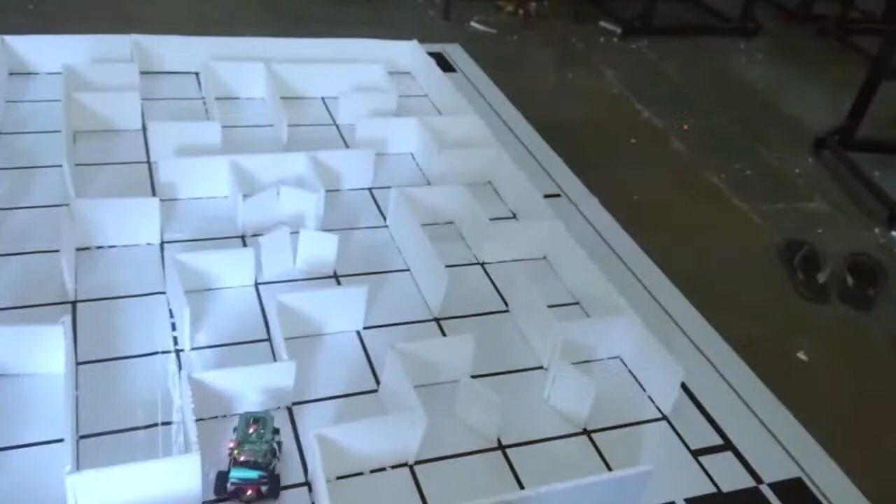Before eYantra, what I used to do apart from studies was totally unorganized. But when I participated in eYantra, they gave me a structured way of learning. From now onwards, if I get a new problem, my approach won't be a hit and trial way. It will be more systematic.

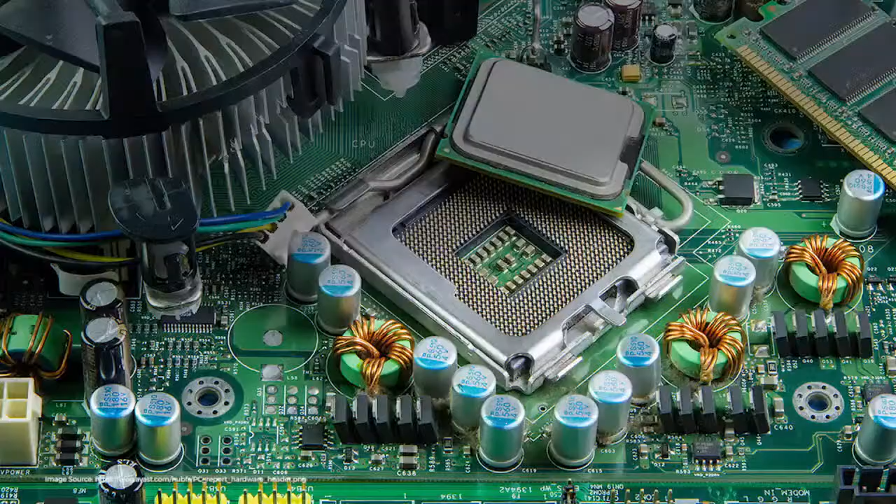We actually got to integrate something mechanical, hardware, with software. Usually most of our projects were either just hardware or just software, so we thought building those parallelly and in the end getting it together would just make the thing work. But actually we learned that we have to do everything step by step. Even if it's software and hardware, they're not totally independent. Everything needs to be done step by step, test if it's working, and then keep going forward.

In mechanical aspects, we tried to design the bot at first and we failed badly. Somehow interdisciplinary subjects were being taught to our brain, fed indirectly, and we were practicing them. So that failure actually helped us to do stuff very good.

We learned how to start from scratch, building things up and how they are working at the back end. That's the main plus point we get here. And this also gets us the interest - rather than just theory, we have the practical stuff going on.

For electronics, PID is taught theoretically in control systems. But when you actually implement it in eYRC, you actually see what you were learning theoretically in the classroom.

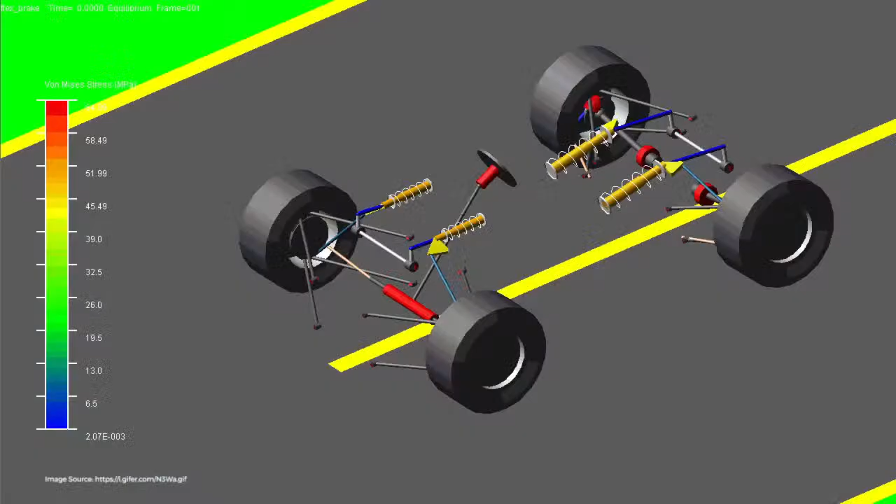Many people have a fear of doing an actual physical robot, the hardware, because in simulation everything works. But when you are implementing something in hardware, there are very big challenges that you face that you cannot predict. So after this entire eYantra competition, I feel that I am very much confident in taking on any hardware projects head on.

When you attend daily lectures in college, you'll be seeing a theoretical explanation of the topics. But when it comes to eYantra, it's a top-down methodology where you will learn things and be implementing them right away to check if it works or not.

And that's how it also stands up against other robotic competitions, where there will be only one thing - you'll go with your implementation and participate. But eYantra is like, it helps you learn. It teaches you first and then checks which was a better implementation. So for me, I think eYantra is a great way, a better way of learning.

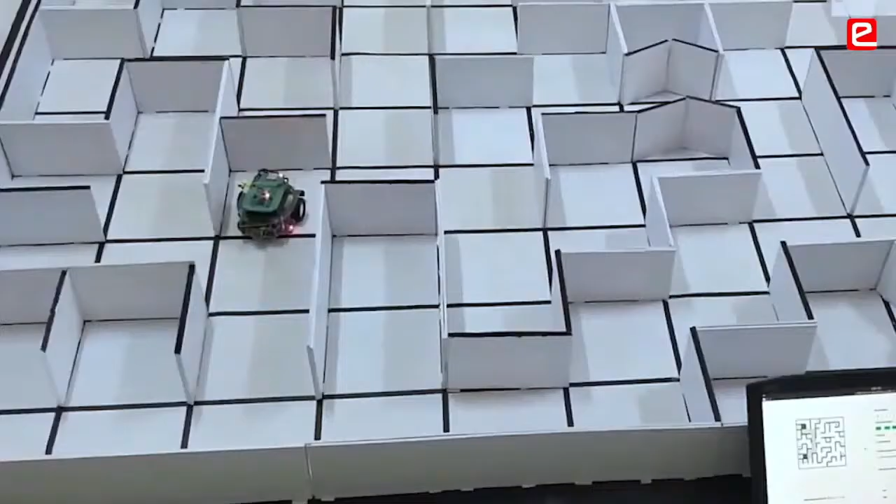Till now, whatever competitions or hackathons we have attended, we have not really found that sort of experience where you're also learning in the process. You're just usually applying whatever you know, and it's more of a test of how much you knew before. Here it's more about how you can come up with creativity and all that. Also the hardware platform was completely unified across all teams.

You don't have time, you make time. Once you are inside eYantra, it's just gonna compensate for the free time - you're gonna have more fun than you had in free time. Working with the new stuff that you get, the kit that they give, and solving these challenges have been more enjoyable and fun to work with.

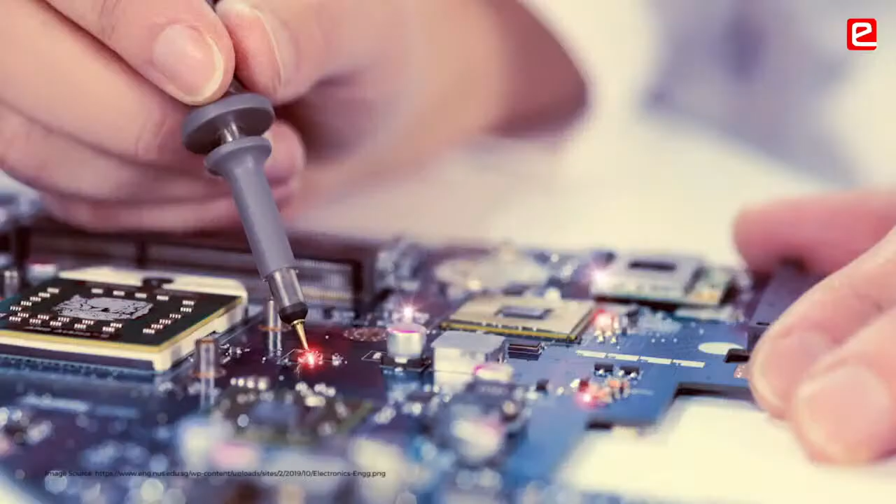eYantra Robotics Competition broadens you, helps you look at various disciplines and integrate them together. Before eYantra we were very limited to CS and were not seeing outside our own branch. We used to think electronics isn't something we should be interested in. But robotics has a huge, broad area of working, so we have to know how to integrate these smaller things and learn a lot of skills not particularly in our branch. I feel a lot of engineers must know this if they want to be particularly good at their applied field.

eYantra is life-changing for me. We saw that even the minutest thing we did in the first task, which we thought would never matter, really came back to bite us towards the end. This has fundamentally changed the way I code and solve problems, and I can confidently say I am a better problem solver right now.

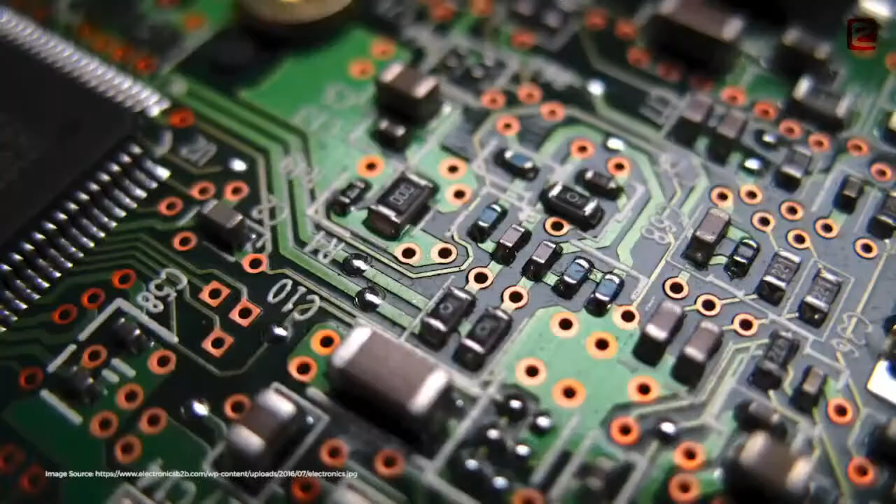I've never done anything like this before. I was only aware of designing stuff, but PCB designing, PCB manufacturing, as well as the electronics part is very much new to me.

For me, it is more than just a competition. It's a place where you can learn new things. Sometimes even people who have interest in electronics can't afford this stuff, so they pass it on. If you take part in eYantra, they provide a lot of things and the guidance is also very great, sir. We had regular discussions on Piazza and all that stuff.

My thinking has changed. A year ago, if someone had said you have to make a fish or a robot that can move underwater, I would have said no, that's not possible for me. I was a leader, and some of my leadership qualities also improved. Other than that, technically it was a blast.

We had to learn a lot of new things and apply them in a creative and innovative manner. eYantra themes are designed so that we have to think outside the box and be creative to get a good solution to the problem they've posed.

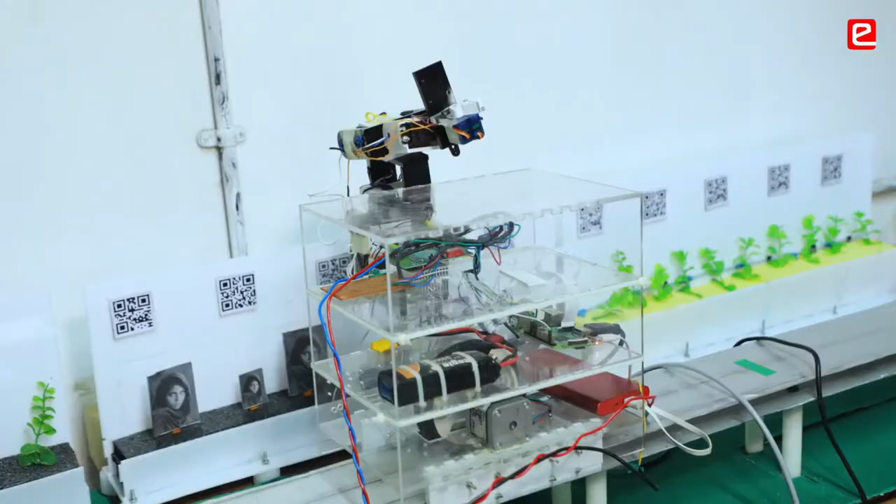Another soft skill it taught me is presentation, how to present things beautifully. Actually, I am from the hardware side, I have worked with hardware, so in that hardware there are many wires and all, and how to present them, mainly that we learned from eYRC.

My confidence was very low. I was not that much confident while speaking in front of the camera or in front of people, but from this competition, I learned all those things.

I also learned many qualities like leadership actually. I was the leader of the team. Before this, I had not been a leader, or I didn't have confidence to lead a team. But here I learned how to coordinate my team and how to get work from them.

At first I had zero level confidence. By entering this eYantra competition, I gained a lot of confidence. It helped me build communication skills and present myself in a better way.

Taking part in the eYantra's idea competition has made me really disciplined. The weekly schedule for the coursework plus the deadlines for round 1 and round 2 submissions really made me disciplined about how and when I should be finishing my work. It helped me finish my final year project earlier and even made it better than before.

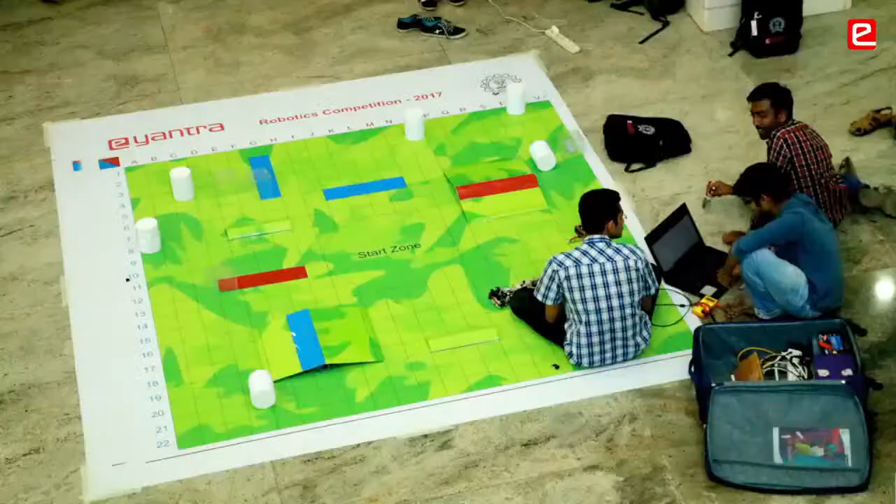Such competitions will not only boost your confidence, but will also give you exposure to a unique type of learning which is lacking in India, that is experiential learning. So I would encourage anyone to join eYantra's ideas competition for the next cohort.

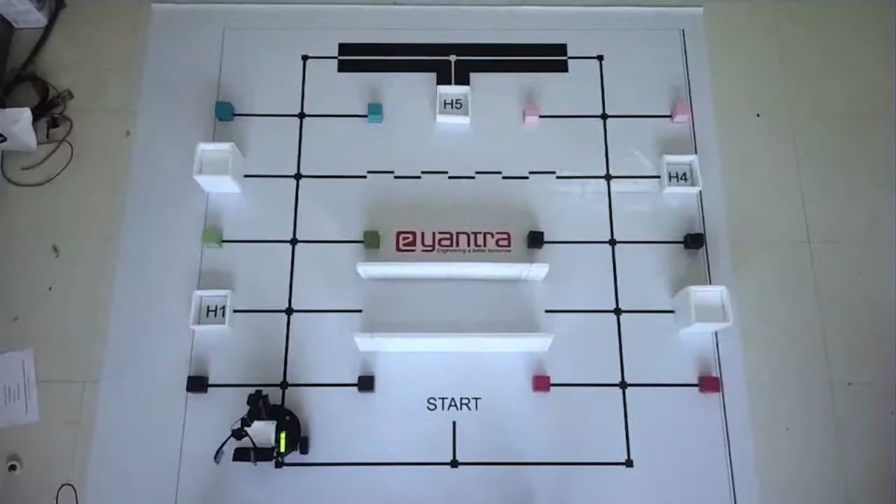It created an impact on me, because all the things carried out through this competition as well as the internship have affected my life a lot. My focus shifted from the comfort zone towards a zone where I can explore more things.

In my life, the change I feel is the confidence I'm getting from eYantra to stand before and speak in a technical language with people or with someone talking to me in that field. I've improved myself in coding with the help of eYantra only. I've started focusing and getting more and more interested in it as I am exploring it.

I was having a problem with peer pressure. I was not able to give a speech or a video to anyone in public, so I was having that peer pressure. Before, I was not talking publicly to anyone, like not having a stage daring. I couldn't even speak a word, I would just leave the stage, and that was the issue.

In some tasks we need to make introduction videos. In those videos, it was like we took hundreds of takes to make a successful one-take video. So due to this I'm now confident to speak among people.

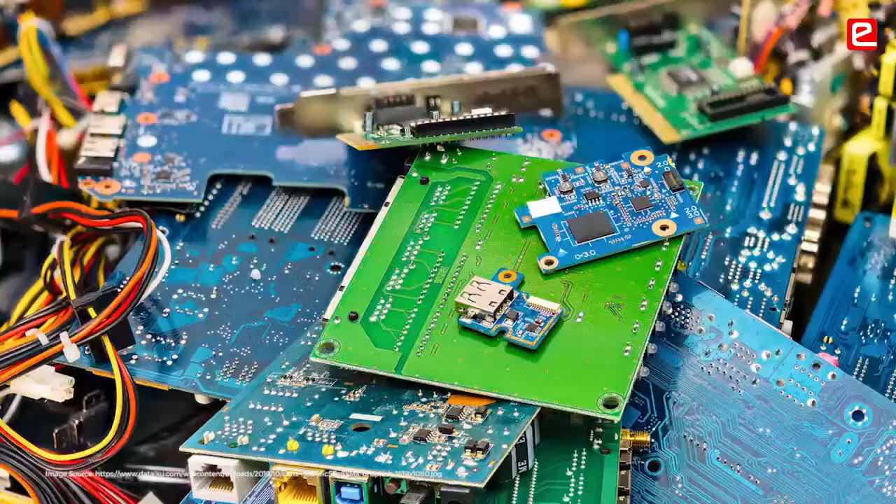I'm in electronics engineering and I was confused whether to go with computer applications like coding, or go in the electronics section like hardware and power supply. So in eYantra I got the idea that I can go with both of them.

It is like a culture for me. Why am I saying culture? Because I want to place one quote: when experts are being built, they are first beginners. And as we are beginners, we are in perfect hands, we think, with eYRC.

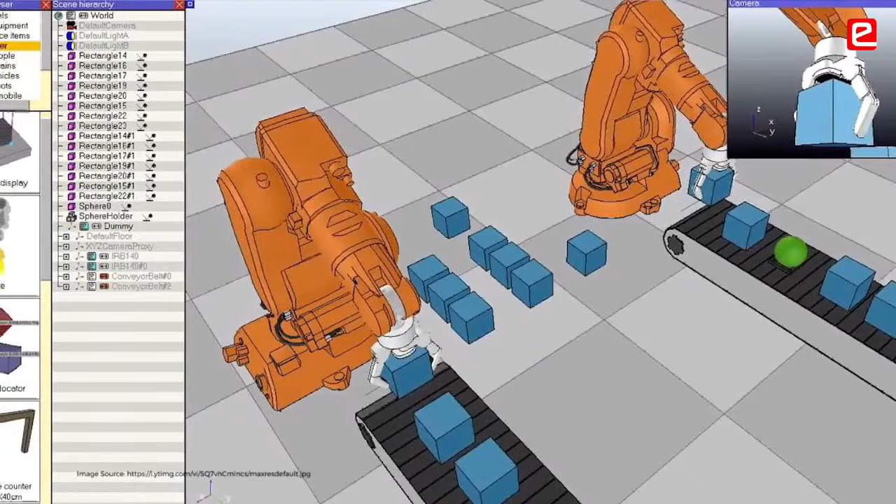Because for getting introduced to all these things, no other platform will teach us starting with the basics, or ask us to first complete basic levels before coming to them. They'll give directly one problem statement, but that was not with eYRC. They started with V-REP simulation, then actually came to hardware testing, and then gave us the platform to start working with the real bot.

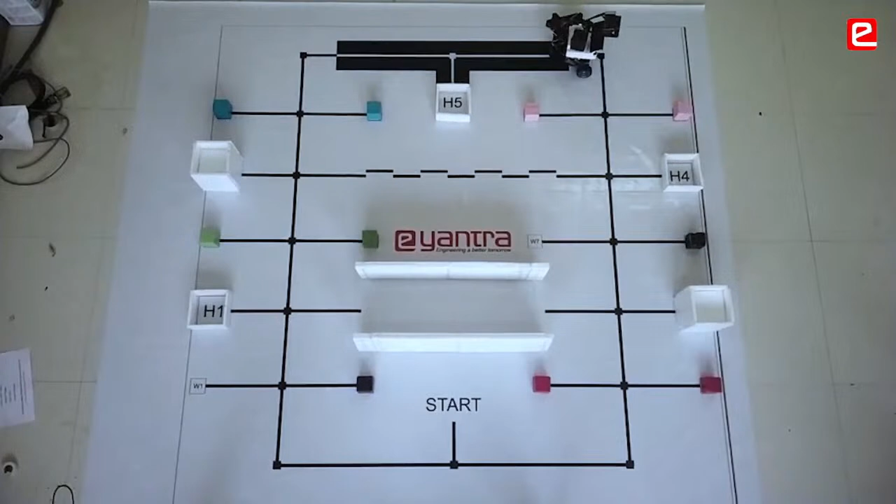They are building us like a family. What our family members do for us, they always think how we can go forward and do things, how this, our children, can get benefit. The same thing eYRC also does.

I will say that no other company will give this chance to us to get such sessions carried out in the internship. They will just provide us the statements and all the problem work we have to do for them, and they will say start with your job. But that was not with eYRC. Definitely, they have boosted us a lot.

The first year I actually missed eYantra, it was because of time constraints, because we couldn't complete the project in time. So it actually taught me how to manage my time.

The second year, I just took some of my friends in the team who I thought would be a great fit, and it would be a lot of fun working on the project. But I didn't actually know how to build or manage a team. So that's the second thing I analyzed on why we failed. I didn't have the team building quality.

So in the second year, I learned team building qualities from eYantra. And this year, I had the perfect team. We managed the time well, and that's why I believe we reached the finals. But this year also taught me a lot of things: to expect the unexpected and always have a backup, in case things go wrong, in case your bot breaks.

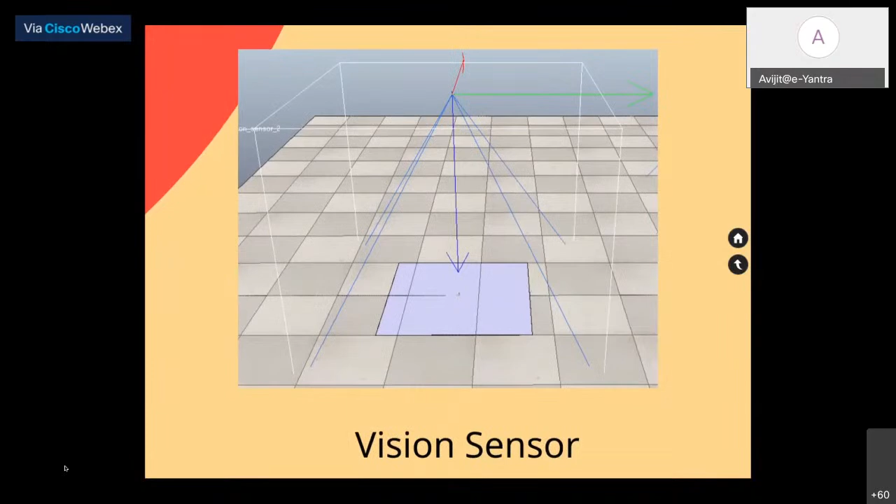Each platform has a vision sensor on top of it, used to determine the location of the ball. This is an example of a 2DOF ball balancing platform that was assembled by the participants. The ball dispenser is used to release the balls at an interval of 80 simulation seconds. The conveyor belt and the downpipe are used to transfer the ball from the center table to the adjacent tables. This is the collection box in which the balls were deposited from the corner tables.

Now let us talk about the AutoGrader application, a cross-platform app that helped in auto-evaluating the task at the participant's end. On the first page, teams had to enter their team ID and the path of the workspace where their codes were present. On the next page, a randomized sequence of the balls was generated. This sequence, when transferred to the simulator CoppeliaSim, reordered the position of the balls in the ball dispenser. At the end of the theme run, the value of various parameters were listed for the teams, and an encoded text file, gibberish to the participants, was generated and submitted on the portal.

Here is our theme film.

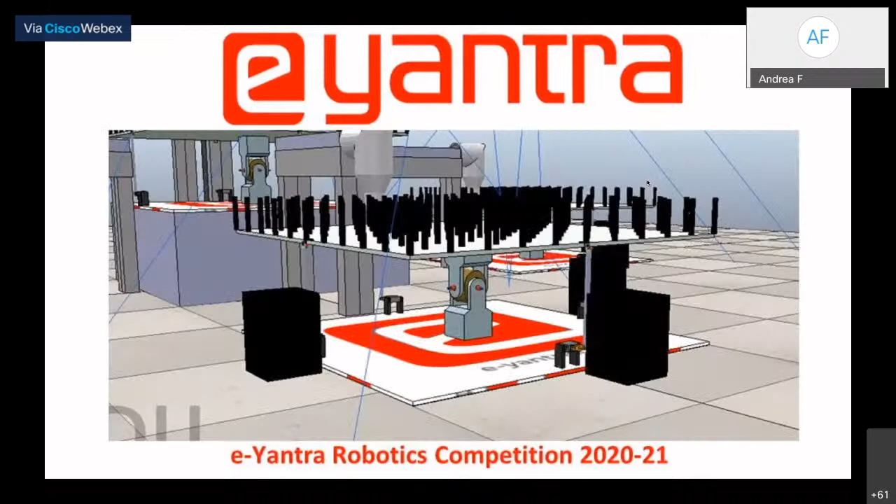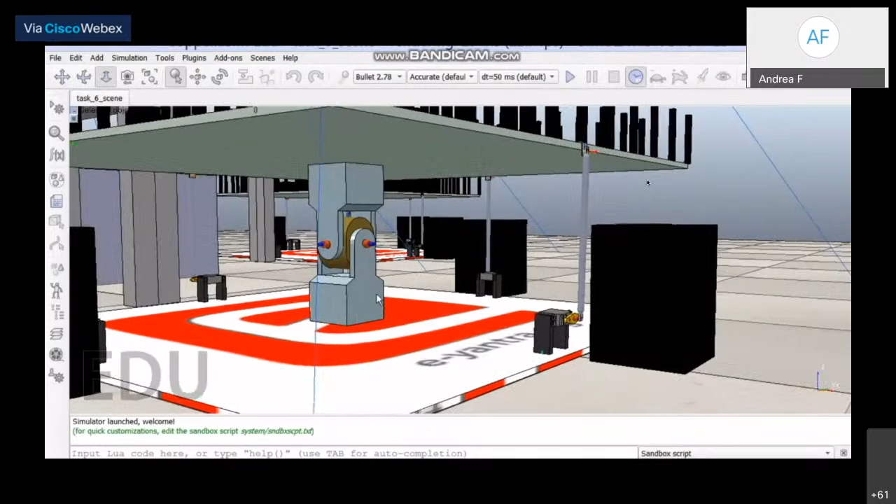The unique feature of our ball balancing design is that we use one servo on each side of the plate, with the L connector connected at the center of each edge. This gives us no vibration, and we were able to balance the ball at any part of the table. Initially, we designed the ball balancing platform using 2 servos, but we weren't able to control the ball at extreme locations on the top plate. Therefore, we used 4 servos and achieved better stability.

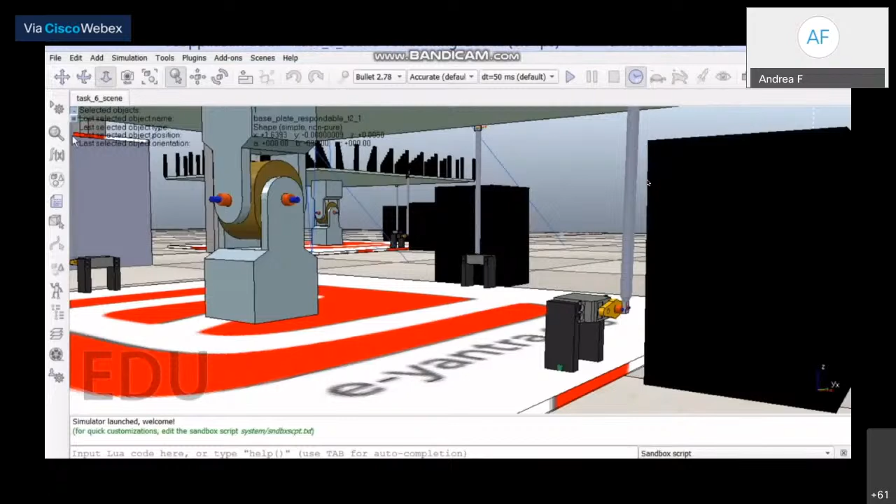We have used revolute joints at places where we need one degree of freedom, that is at the yokes, and force sensors at places where we need rigid links. The ball balancing platform is controlled with the help of revolute joints attached to the servo fin. The handles of the revolute joint are initialized in the task 3 init setup function, and then with the help of PID control, the revolute joint angles are changed in the control logic function, thereby controlling the maze.

This is the grader application. We first enter our team ID followed by the directory of the Python files. Next, we click on the start button on the GUI app.

We have designed our ball balancing platform using 4 servos, one on each side. Using 4 servos provides an additional advantage to control the ball at any point on the table. The L connector is connected at the center of each edge, thus providing stability and avoiding vibrations.

To maintain a real-time factor of 1, we inverted the model properties of the inactive maze tables so that only the maze table in which the ball is traversing is dynamic in nature. We have called the control logic which controls the servo movements of the table every 100 milliseconds. The ball balancing platform is controlled with the help of revolute joints attached to the servo fin. The handles of the revolute joint are initialized in the task 3 init setup Python file, and then with the help of PID control, the revolute joint angles are changed in the Python control logic function, thereby controlling the top plate.

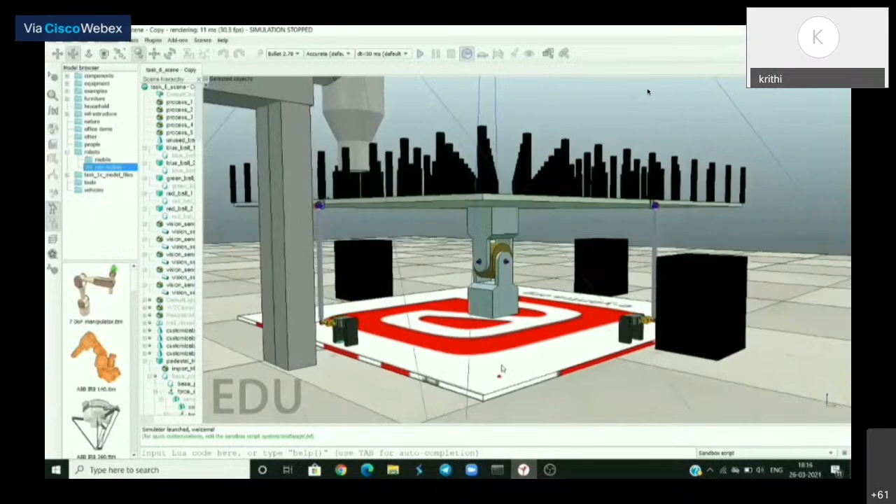Our team was assigned the task of designing a 2DOF ball balancing platform as part of the theme. The unique feature of our ball balancing platform is that we aimed at achieving the best performance using the minimum number of resources or equipment. So we have achieved 2 degrees of motion by using 2 servos. We have used a universal joint at the center of the model which supports 2 DOF motion.

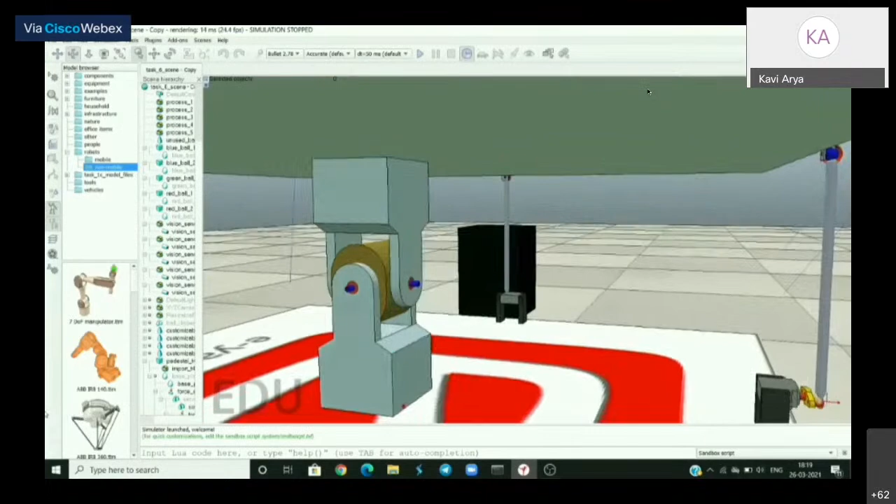Initially we considered the use of 2 as well as 4 servos, but in our simulation we found that the universal joint was capable of holding the weight of the top plate. Also, in the case of 4 servos, the 2 servos which would act on opposite sides would perform the same job, also increasing processing. Thus, we have finalized our design by using 2 servos.

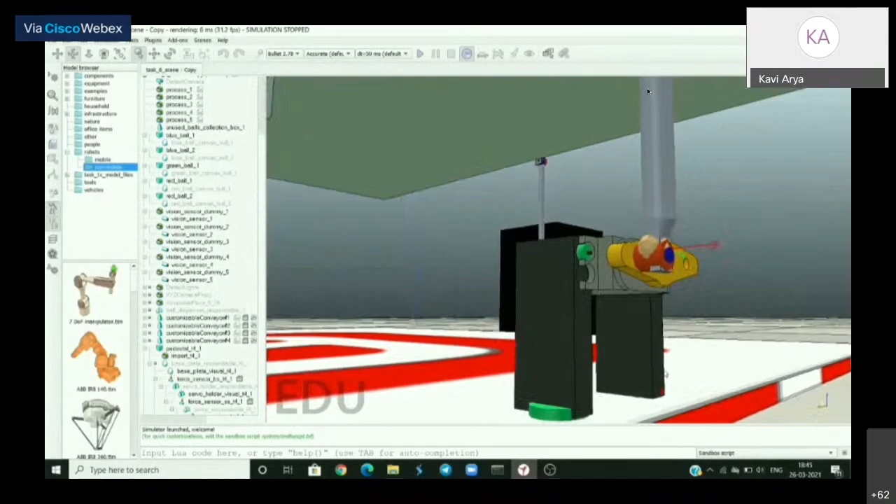The servo fin is connected to the servo by using a revolute joint which is motor enabled. The servo fin is made to rotate in the range of -90 to +90 degrees. This rotation of the servo fin causes the up and down motion of the connecting rod, which is connected to the servo fin by using a revolute joint.

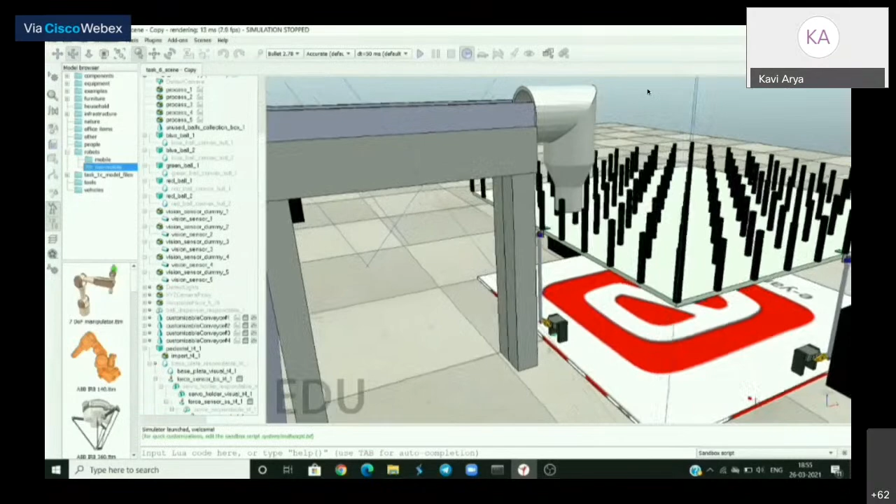This up and down motion of the connecting rod causes tilting of the top plate, which is connected to the connecting rod via an L connector and a spherical joint. The spherical joint, being a 3DOF joint, assures smooth movement. The platform is controlled by using a PID controller which computes the error in ball position. This error is used to adjust the angle of the servo fin accordingly.

Simulation starts with the generation of mazes on top of the tables. The provided maze images are processed to form encoded maze arrays which are used to generate walls on the tables.

The first ball is dispensed from the ball dispenser and is transferred to the first table T4 through the conveyor belt B4. From the conveyor belt, the vision sensor detects the ball and the color of the ball is detected. Here it is red.

The collection box is determined by reading the ball details JSON file provided to us. Here the collection box is found to be CB3 on table 1.

The path drawn on top of maze is found using A-star algorithm. We used A-star as it gives the optimal solution by using heuristic function in a shorter time.

The second ball has dispensed from the ball dispenser. By this time, the first ball has completed its traversal.

The second ball is a blue ball and its collection box is determined as CB1 on table 2. It is transferred to the table T4 for traversal.

The ball motion is controlled by the PID controller. From each table, the corresponding vision sensor image is processed using image processing to find the ball coordinates. The error function used by PID is responsible for the movement of the ball.

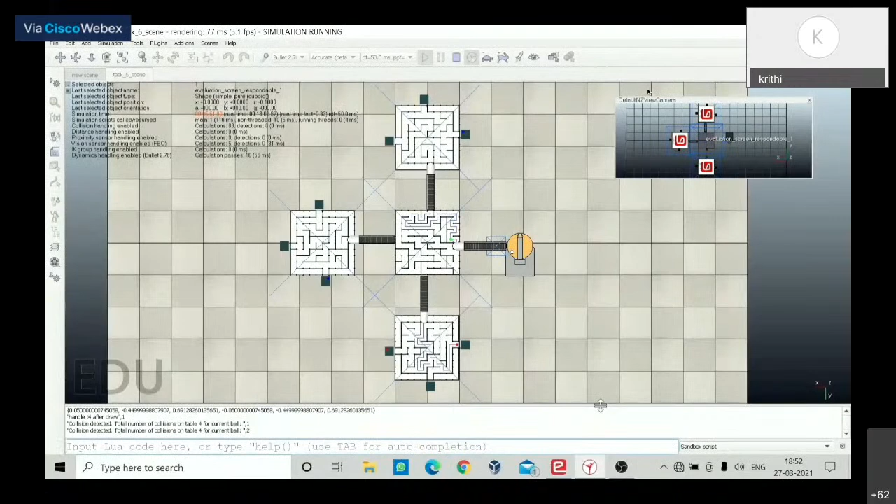Now we can see the parallel processing. Both the fifth and fourth balls are traversing at the same time on different tables. The last ball is a green ball and its collection box is determined as CB2 on table 3.

Another challenge was finding the ball coordinates when the ball passes through the end cells, as seen now. The height of the walls was making it difficult. We used Hough circle to estimate the circle and to find the centroid in this case,

and minimum enclosing circle when Hough circle was not giving the proper results.

Tuning the PID was the most difficult part for us. We found that the ball underwent collisions on traversing long paths. To solve this, we considered intermediate set points when the difference between two set points is large.

With all this, we could come up with an algorithm that gave us good results. Thank you.

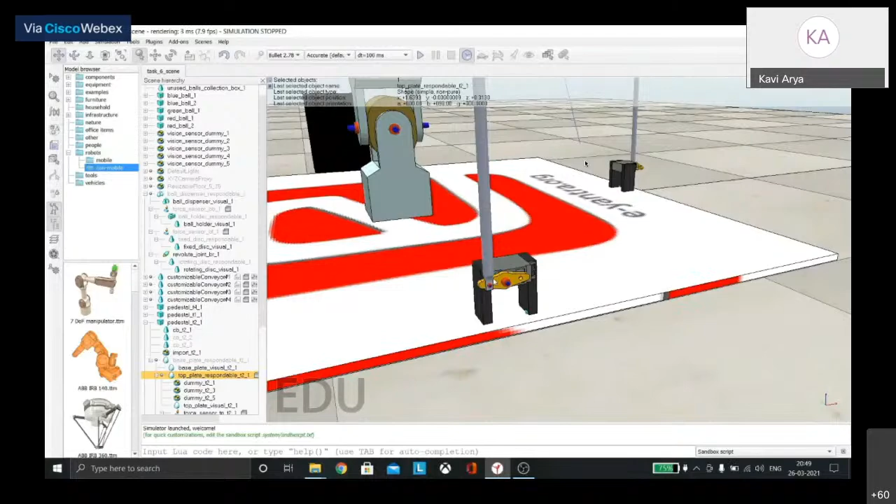The algorithm sends signals to each fin that tell them to rotate in a certain way. The connections from each fin all the way up to the top plate ensures that the platform inclines in the way it's intended to. The servo fins have opposite orientations to each other. This was done to make the code structure more aesthetically pleasing.

Our code is generic enough to support each and every table, the only changes being the table serial numbers like T1 and T2.

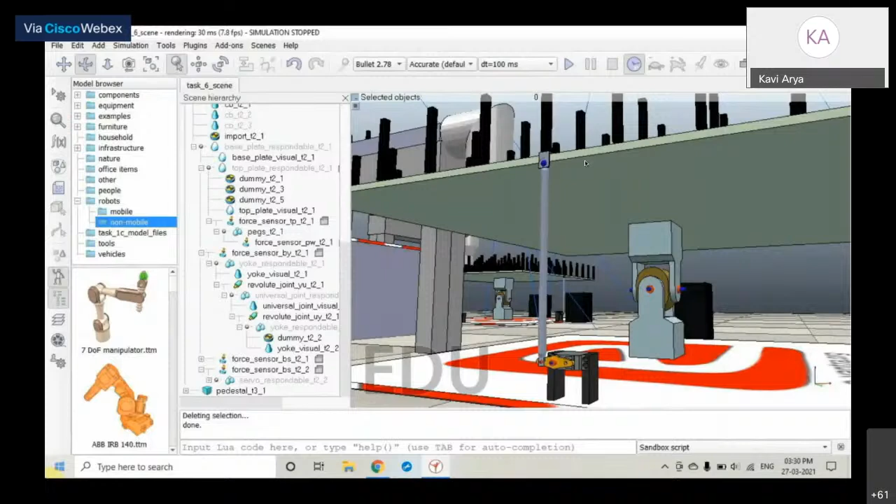In order to make the support at the center, we use two yokes along with a universal joint, that were connected by using two revolute joints. We have two servo motors, so it requires four servo holders to hold the servo, and each two servo holders for each motor. The shaft of the servo motor is connected with the servo fin.

The servo fin is then attached with the connecting rod. The other end of the connecting rod is connected with the L connector. The L connector and the connecting rod are joined by a spherical joint, and the joint between the servo motor and the servo fin, and the connecting rod and the servo fin, is revolute. So a similar connection is made to the other servo also.

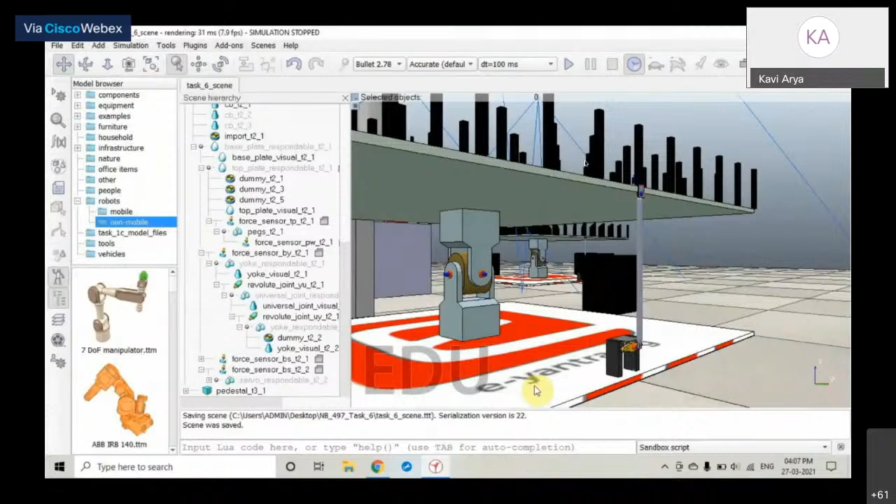So thus we completed our ball balancing platform. In total we have used two servo motors, four servo holders, two connecting rods, two servo fins, two L connectors, a base plate, a top plate, two yokes, and a universal joint.

So we are about to start our evaluation for the final team run. Now the grader application takes control over the simulation. We can see that all the mazes have been successfully decoded and generated. Now as the simulation has started, we have the blue ball arriving first.

Now the first ball has been transferred to table 2, where it will be navigated to collection box 1. We use the A* algorithm for path planning, which uses heuristics to find the shortest path, which also takes care of the direction. Now we can see the second blue ball is about to arrive at table 4.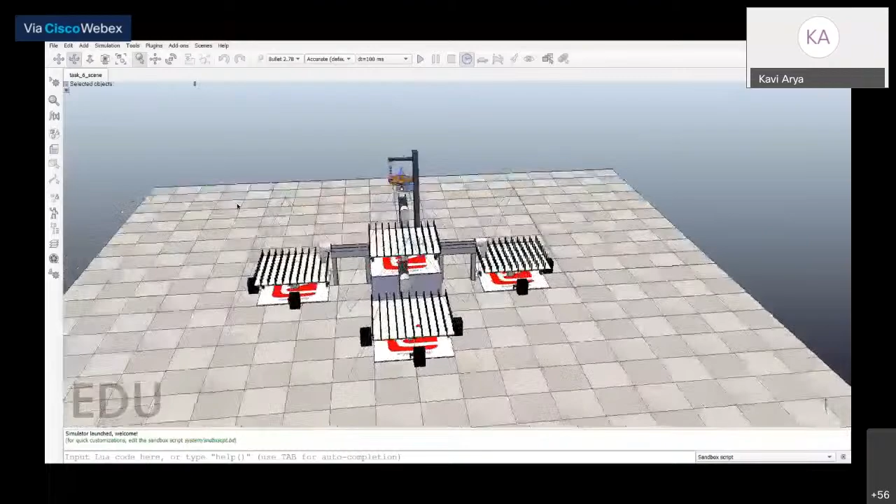While designing the ball balancing platform, our main objective was to design a simple, no-vibration, stable model. We were very conscious about designing a model using fewer components but with good stability.

Two yokes connected using a universal joint have been placed in the center to support the top plate during its movement. Four servo motors have been used for the perfect continuous tilts of the plate with respect to the ball traversal, and opposite pairs of servo motors work synchronously in exactly opposite directions.

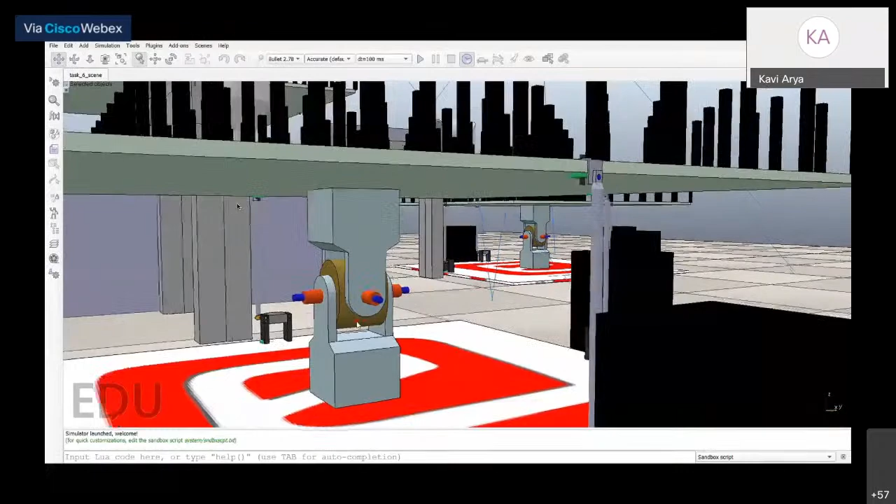The servo fin is positioned parallel to the top plate for easy calculation of the output angle. Since it is a 2 DOF platform, each pair of servo motors controls one direction. The servo angle is obtained for each axis separately using PID, and it is given to each servo motor in the same magnitude but opposite direction.

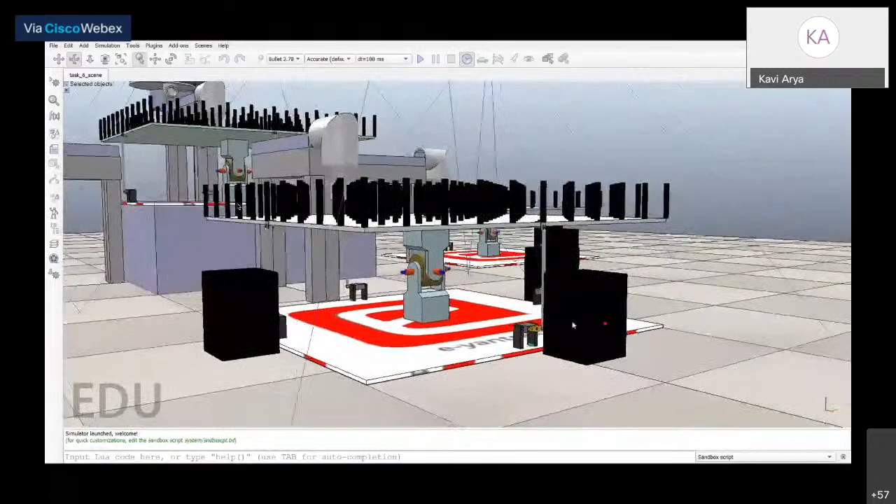One special feature of our design is that we have used 4 servo motors rather than 2. This contributed majorly towards stability, especially during the continuous tilts of the plate when the ball is traversing. Using 4 servos, the table cooperated very well with the code.

The ball is passed onto the conveyor belt by the ball dispenser. We have used a hold and release mechanism to prevent the initial collisions and deviations of the ball.

We have made the ball traverse faster by applying a threshold instead of making the ball traverse to the exact set point. We make the ball shift to the next set point as soon as it is within a particular distance nearer to the set point.

When the ball gets deviated from its path or when it is not found by the vision sensor, after a few seconds the shaking function is called. Through this, the table shakes slightly and the ball gets back to its position, and then the backup function is called. The ball finds its path from its current position to the actual endpoint and traverses through the path.

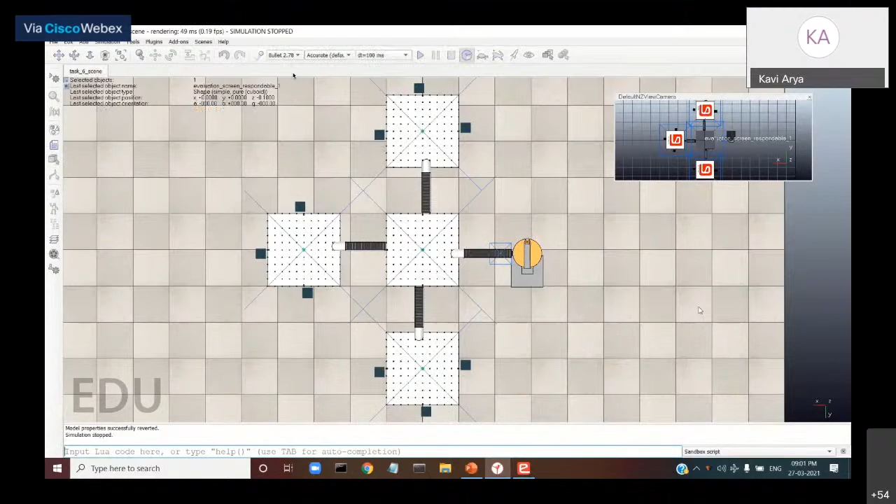So that was team ID 2487.

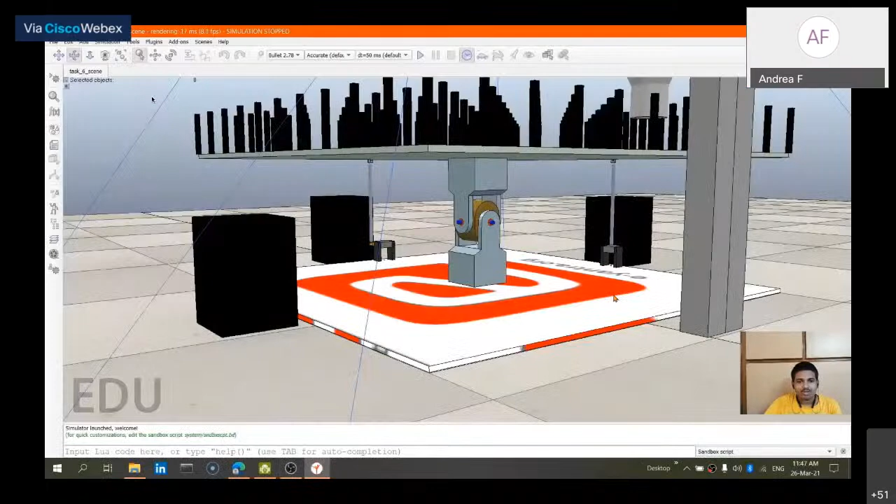Coming to the ball balancing platform design, this is a ball balancing platform which we have used for the whole theme run. Here we can see that the top plate is connected to the servos with the help of L connectors and connecting rods, which will help in the movement of the top plate with respect to the movement of the ball. We can see that a universal joint is given as a support to the top plate, so that if the ball weight is increased, it will not collapse.

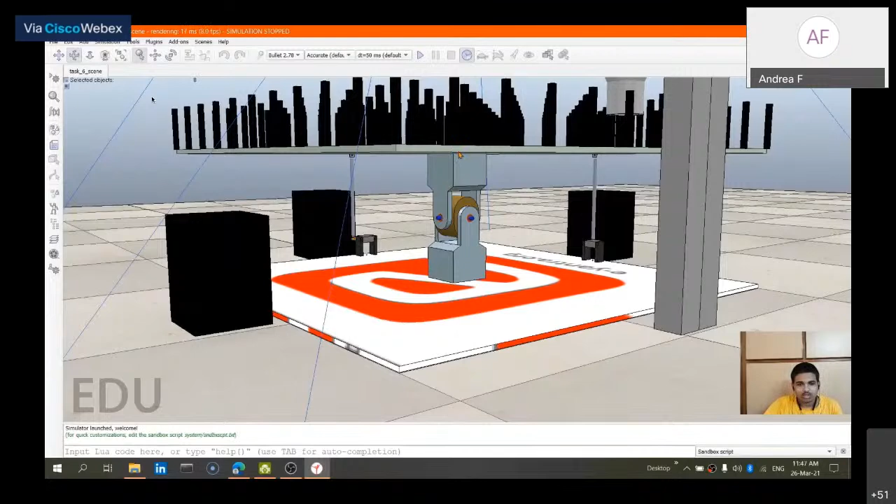Coming to how we have designed the ball balancing platform, we learned about each and every part given in the eYantra portal and where we should use it in the design, from the internet. For example, we learned about the yoke and how to use it in the ball balancing platform, so that we came to know we should use it to get a two-dimensional movement for the platform. Similarly, for every part we learned what is the use of that part. Finally, we merged all the learnings and came up with this design.

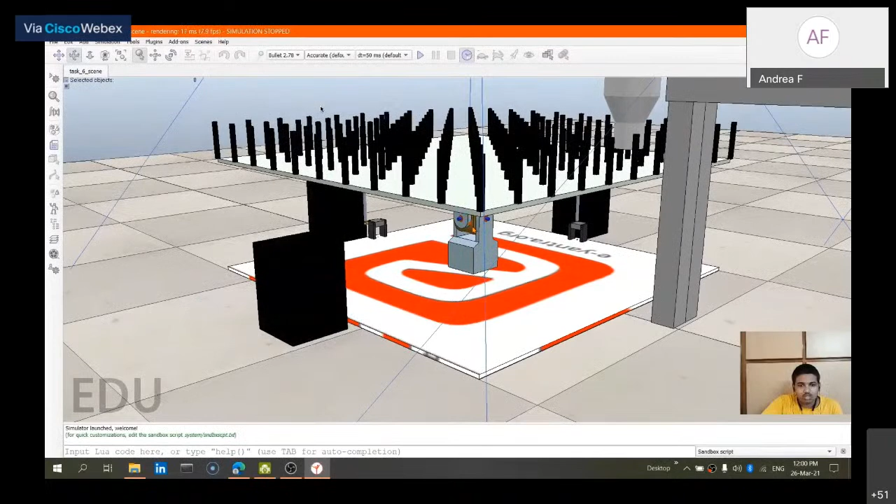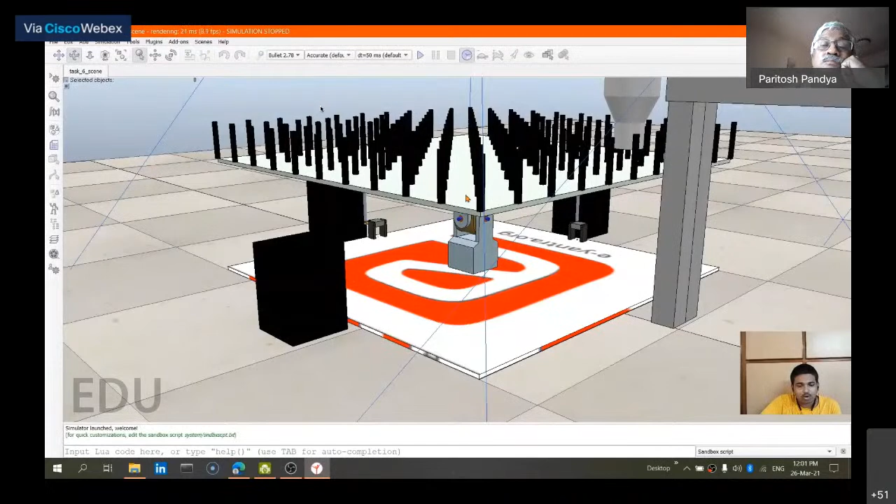Coming to the algorithm supported by the ball balancing platform, we have used Lua for customization scripts of the platform, in which we wrote code for generating the mazes on the top plate, and also used the Lua script for deleting the mazes generated after the simulation is completed. We also wrote a Python script which can control the ball on the top plate using the images generated by the vision sensor. Finally, we established a connection between Lua and Python using the remote API functions mentioned in the CoppeliaSim help files. These functions work coordinately, and the ball is traversed from the starting point to the ending point with the help of both algorithms in Lua and Python.

Regarding the traversal of the ball, you can see that it's pretty fast because we had prioritized speed over collisions. Truth be told, we thought the final mazes would be really tough, but we didn't want to make any last minute changes, so we thought this code was robust enough to handle it.

Regarding the starting collisions, that is the collision when the ball is being dropped, we included an algorithm where we decided to use geometry. We tilted the top plate at an angle so that the ball won't be released out of the maze until the vision sensor has detected a ball on that particular table. So you can see there are no collisions at the beginning of the traversal, that is when the ball is dropped.

Regarding the traversal at the endpoint, after reaching the endpoint, we simply used an algorithm where we gave a certain angle after the traversal so that the ball will move to the next maze.